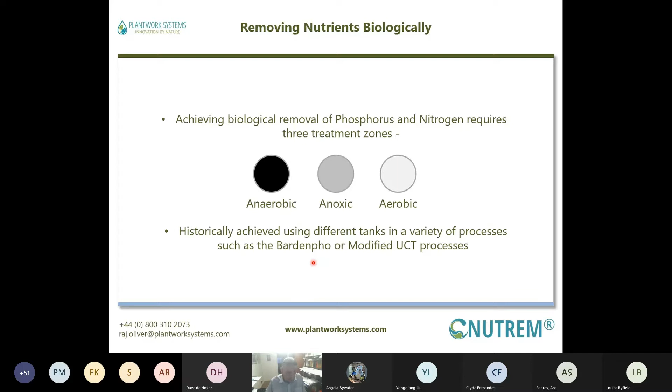NUTREM provides these conditions in one reactor. It's totally different. The whole thing, with various phases, is packed into one single reactor.

The prescription can be easily multiplied regarding the size of the plant to be designed. What is important to notice is that the process phases are separated from each other by time rather than physical space and volume in the form of various numbers of tanks. This basic difference provides benefits in great flexibility in process control, small footprint, and a better price.

Here you can see the indicative process diagram in general. We will go through the details later in connection with individual equipment. The front end, as usual, has 6 mm screening and grit removal, and FOG removal in special cases. There's an offline VFA factory to boost the functioning of the BTF, which plays a double role as a flow balancer and a holding capacity to allow dump fill into the reactor. The number of BTFs and reactors is determined by the number of loading heads producing the wastewater.

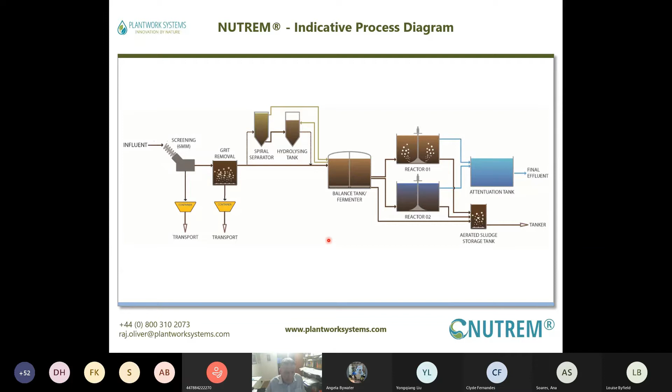In the process, the influent is collected within the balance tank where it is mixed mechanically and gently in set periods to back up the fermentation process. The influent is then fed slowly into the settled sludge blanket within the reactor, whilst the reactor is in settlement mode.

The hyperboloid mixer is set to mix at a super slow rate and not to break the top of the blanket. The reactor decants the effluent of the preceding cycle by the piston force feeding the effluent out via a special siphon decanter.

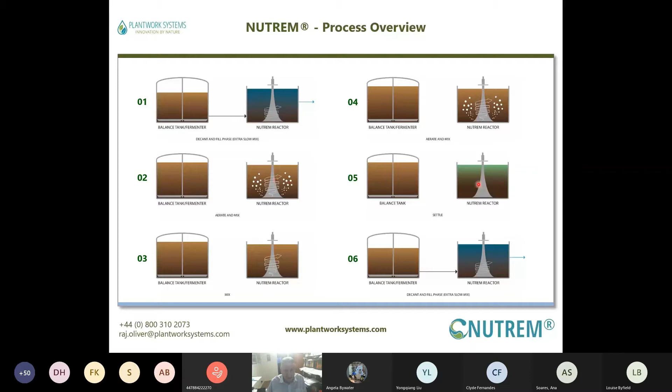Once decanting is completed, the transfer completes and the reactor fills. Regarding the targets, the reactor is then either anoxically mixed or aerated. A second anoxic and aerobic phase can be performed, and the process then repeats: from the balance tank to the reactor, then anoxic mixing or aerated mixing and settling and repeating and discharging again.

Here's the balance tank fermenter combination. This combination is an offline hydrolyzing booster and inline BTF. It's one of the key parts of the process.

It's well known that the P removal process is a reciprocating P release and P luxury uptake, partial processes performed by PAOs. To work, the PAO bacteria need energy, which is introduced in the form of VFAs, the volatile fatty acids produced from readily biodegradable COD in the raw sewage.

The spiral separator takes 10% of primary sludge at all flow conditions, from dry weather flow to full flow to treatment or storm conditions. The flow from the spiral separator is fed to the hydrolyzing tank at 3% suspended solids content.

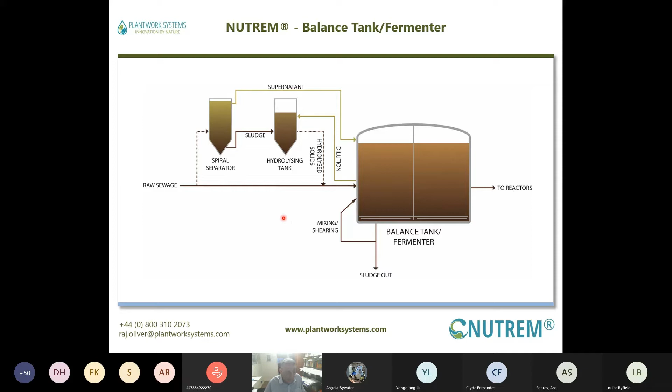Here's a view from inside the BTF. There is a slowly rotating mixer scraper close to the bottom of the tank, gently and frequently mixing the content of the BTF, which intensifies the fermentation, and on the other hand moves the thickened settled sludge towards the outlet opening for desludging.

Feeding into the reactor takes place at the bottom of the settled sludge blanket, which is one way to keep the settled sludge blanket at a standard height.

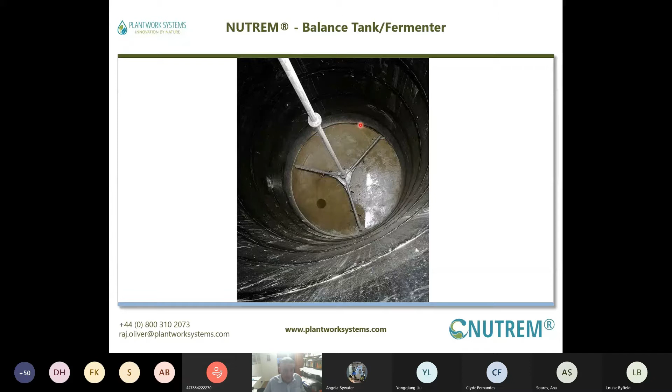NUTREM reactor seen from inside. You again see the circular tank, mostly made in our case in glass fused steel tanks, or at site cast concrete or slab made. And in the middle of the reactor is the hyperboloid mixer aerator.

On the outer circle you can see the shearing fins which shear the air in the aeration phase, an air pipe feeding the air into the sparger ring which is underneath the hyperboloid mixer, and baffle plates to prevent the whirlpool effect during the anoxic mixing, when there is only mixing on and not aeration.

When used for aeration, the air is introduced under the mixer body, through the sparger ring, and the shearing fins shear the air.

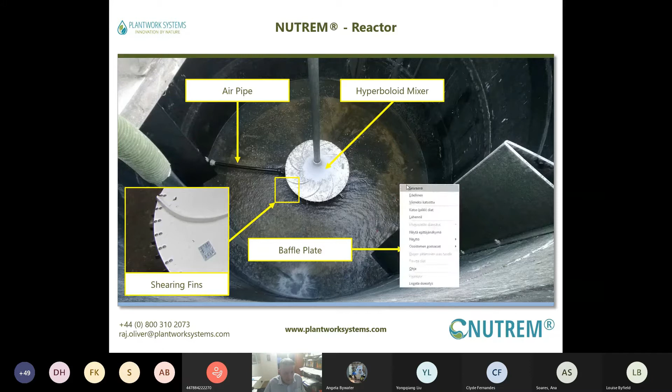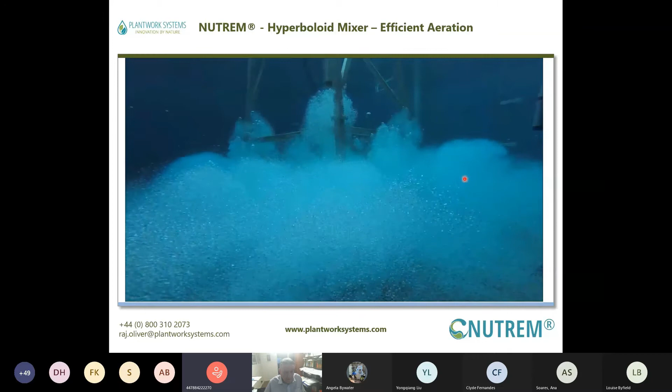This is very interesting. As you see, the air is widespread over the whole bottom of the tank with small vortices mixing it with the tank, and there are no dead spots which are found with fine bubble diffuser systems, where the diffusers can be far from each other and the bubbles rise directly upwards without mixing the whole bottom of the tank.

This schematic shows the hyperboloid mixer in a NUTREM reactor. The sewage from the BTF is introduced from underneath the hyperboloid mixer, whilst the mixer rotates very slowly. The contact between the incoming raw sewage and settled working anaerobic sludge is ideal.

This is a real winning property of NUTREM. The sewage fully mixes with the settled biomass and infiltrates upwards through the sludge, contacting the worthy PAOs, which release the phosphorus from the cell mass into the surrounding bulk liquid. We call this a piston effect.

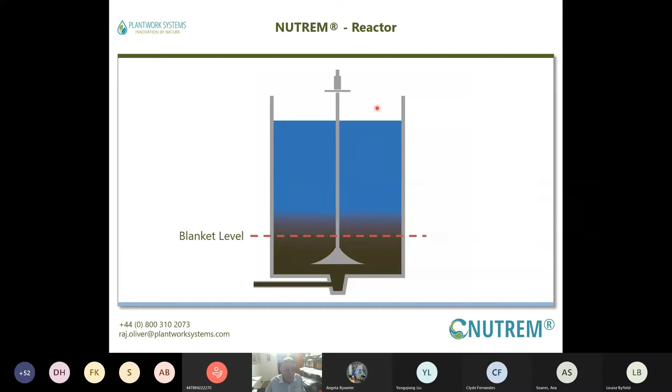At the bottom it's almost 8,000 milligrams per liter, gradually decreasing when rising up, and at 1 meter there is almost nothing left. At 2 meters, where the blanket top level is, the whole settled mass is tightly there.

The blanket top is sharp like a knife, we say, and released phosphorus at the bottom, where it has been the longest time in contact with the incoming raw sewage. The released phosphorus concentration can be 200 milligrams per liter, gradually decreasing the higher the measuring point is.

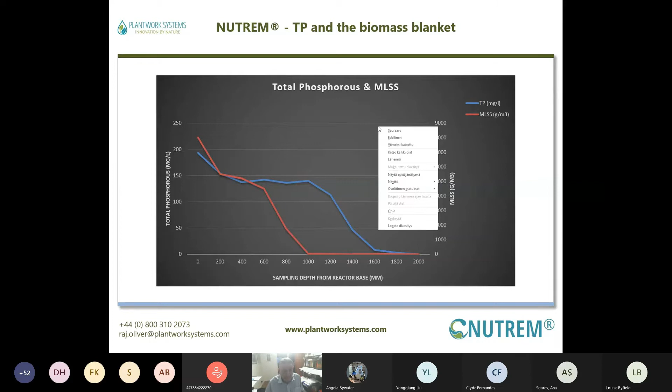At 2 meters there is almost no phosphorus in the bulk liquid. This is surprising, and the same now in the table: at the sampling height at the bottom, total phosphorus 193, MLSS 8000, with gradual decrease and gradual increase.

The total phosphorus can be 0.15 at the top of the blanket, and suspended solids 5. This shows the very good settling properties of the active sludge.

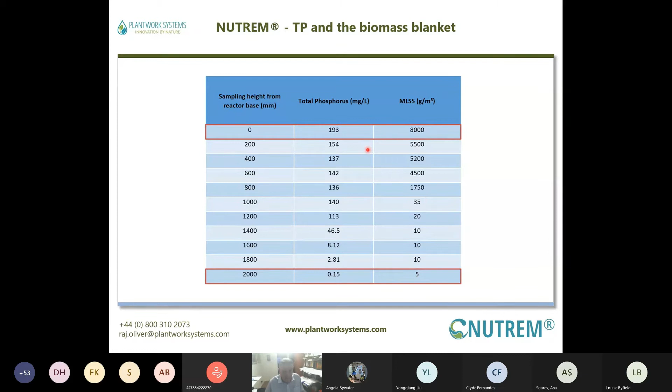Why is this important? It is important for the safety margin, because after a full load there is still a 2.5 meter clean water layer. There is a deliberate stratification in the piston below the discharge point, and this was very hard to believe for the professionals when we first introduced the idea of the piston discharge.

In SBR it's important to save time for active phases of the process, so now the fill and discharge is combined. The normal water depth is 5.8 to 5.9, which provides an even larger safety margin. The 5.8 relates to calculation; the aeration height of 5.9 in an SBR gives the best price for capital costs and expenditures.

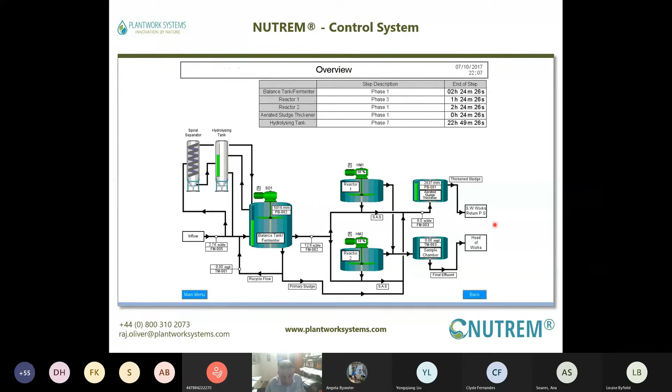Here's the balance tank fermenter, and you see the 2 reactors here, and the colored pump shows what phase is going on. The normal route is from the main incoming sewage via the front end into the balance tank, to the reactors, aerated sludge thickener and sample, and outflow to works.

P7 is pumping that out, returning.

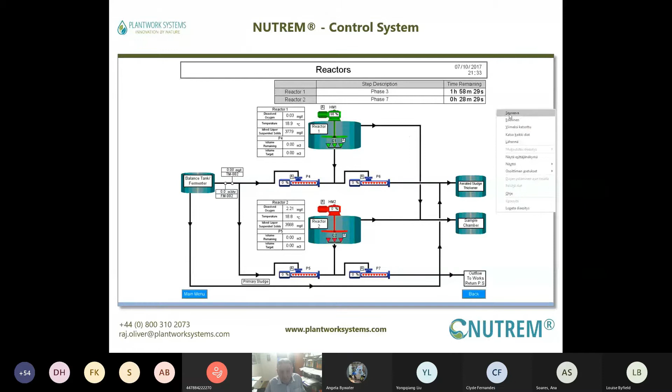And where is the home of the pilot plant, or test plant, or however you like to call it? It's at Hants, south of England, located at Southern Water Petersfield sewage treatment plant.

That's pretty far from the front end where the flow is coming in, and at the front end there is screening and grit removal, and the main tunnel forward, plus the ferric dosing and the intake point for NUTREM, before the dosing, to get the real raw sewage there. The line has been installed here and the test plant is around here.

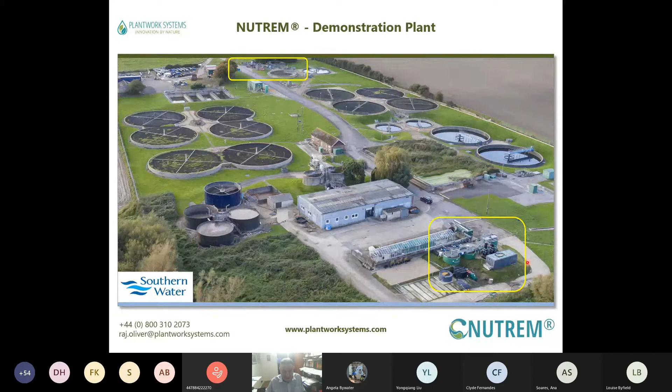Our normal prescription: balance tank fermenter, reactor 1, reactor 2, aerated sludge storage tank - this is the main combination.

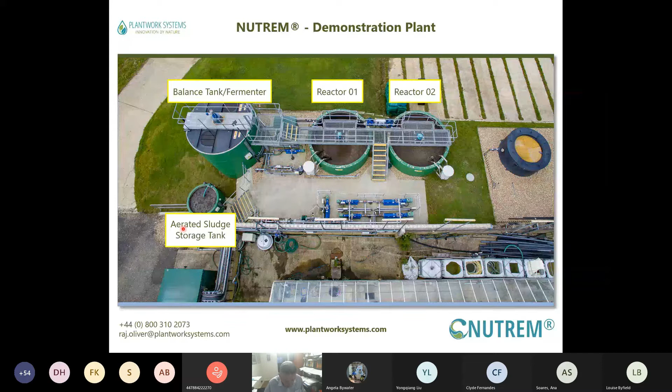The next one was commissioned September 2014, with a limit to take only 50 cubic meters, which was the actual fixed load. The consistent results demonstrate TP removal down to levels of 0.1 to 0.3, and stable operation maintained during winter periods when there was diluted water.

Ammonia - you can see it is diluted, because in a separate sewerage system country this can be 70, 75 or 80 milligrams per liter, but here when all the water is collected into one big sewer, it's diluted. The actual result, in milligrams per liter, is 0.28.

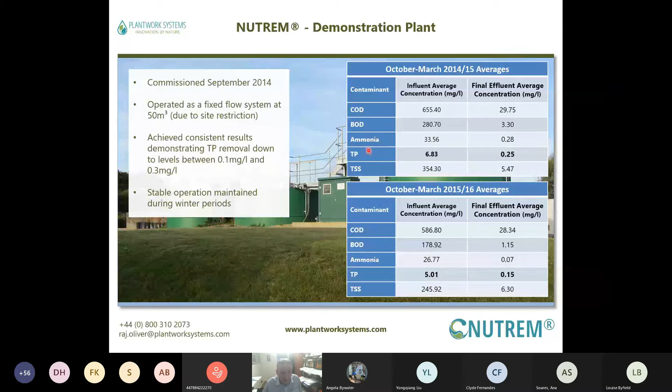And then we went to the UKWIR test, where phosphorus removal was the number one target, and we installed the spiral separator and the hydrolyzing booster to improve the VFA production, because the incoming raw sewage was all the time very much diluted, and the fluctuation during the diurnal flow period was very big.

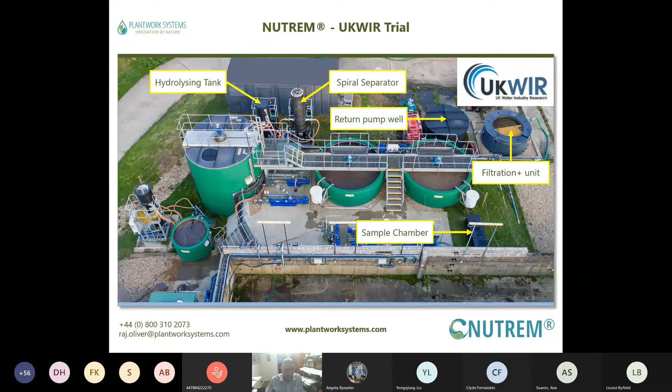Sample chamber here, where it's coming in, and the siphon decanters can be seen here, and the plant return well. Here you can see how it's arranged: there's the main wastewater treatment flows and the NUTREM plant flows, and the permission to take water for the UKWIR test was increased from 50 cubic meters per day to 120 cubic meters per day, to follow the real normal life of how the plant is living.

As you can see, this is September 30th: 3 o'clock at night, 6 in the morning, 9 in the morning, a jump up at noon, and in the evening, as normal, the high point there, and here it's now already close to 140 cubic meters.

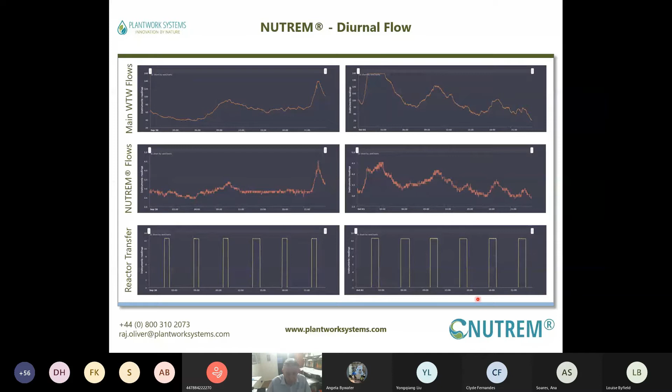The NUTREM plant curve is similar, totally similar, and the NUTREM is fed regarding these flows. We have six strokes per day, or six cycles if you like, and four various sizes of cycles. The pillars here describe the fill, how much the fill is, and the wider the pillar, the bigger the flow. You can every day follow these on the screen from home, from the office, or from the kiosk at site.

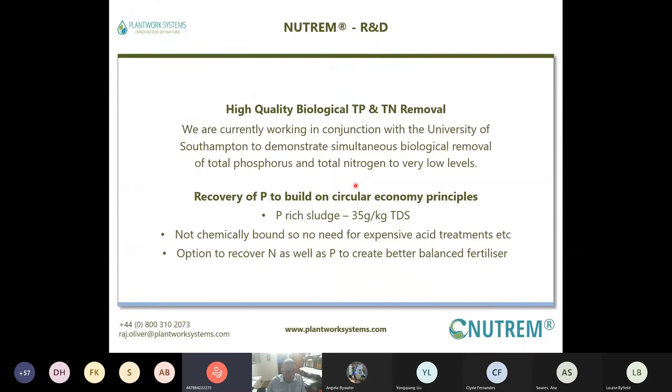I thank you very much for your attention, and I'm open for questions, professional questions.

When I was first in this country in 1990, we had a presentation at St. Peter Hotel at Guernsey Island, a very beautiful Victor Hugo ballroom. After one hour's presentation, I said I'm open for questions, and several hands rose up, and the chap in the front row was there, and I said, it's your turn. He popped up and said, who else wants to go to the toilet? So, other kinds of questions, please.

Thank you, Juhani, thank you very much for your excellent presentation. Yes, there are a lot of interesting questions for you, so I will pick up some questions first, and you probably answer a few. After Anna's presentation, we can put the remaining questions at the end of the session together. Yes, I think, sorry, it's my pleasure.

One question: for the traditional BNR process, if it is well operated, usually the TP can reach as low as 1 milligram per liter. But for NUTREM, you can reach much lower levels, such as 0.1 to 0.3 milligrams per liter of TP. What is the critical factor that makes NUTREM successful in achieving lower TP?

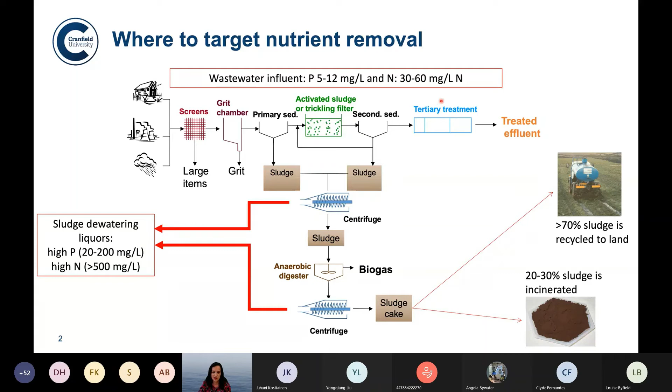As Juhani was mentioning, the sludge and the nutrients that accumulate in the sludge, especially if we have a BNR process, there will be high concentration of phosphorus, as this is removed by capturing within the cell. A way of recapturing those nutrients is to recycle the sludge to land. There's a lot of initiatives as well looking into sludge ashes from thermal processes to recover those nutrients, especially phosphorus. So there's a number of initiatives and processes. I think Juhani's presentation was mainly about BNR processes and removing the nutrients, but I want to focus here today on the recovery of nutrients and why we should focus on recovering those nutrients.

Phosphorus has been under debate for a long time - it's been called the disappearing nutrient. It's currently mined in quite specific countries such as Morocco and Western Sahara, which have sort of the biggest reserves of phosphorus. There has been quite a lot of information out there about how much phosphorus there is worldwide and how big these mining reserves are. Back in 2006 there were some numbers published saying that the phosphorus reserves were about to finish, that we had about 100 to 200 years left of phosphorus if we continue to mine at the same rate.

This created a little bit of awareness, but also some countries that have quite a big production of phosphorus, such as United States and China, have started looking at their exportation of phosphorus in a different way. This has created a debate about whether we can capture phosphorus from wastewater, and the best ways to do that, and then try to put that back into the market - for example chemical production, fertilizer production, etc.

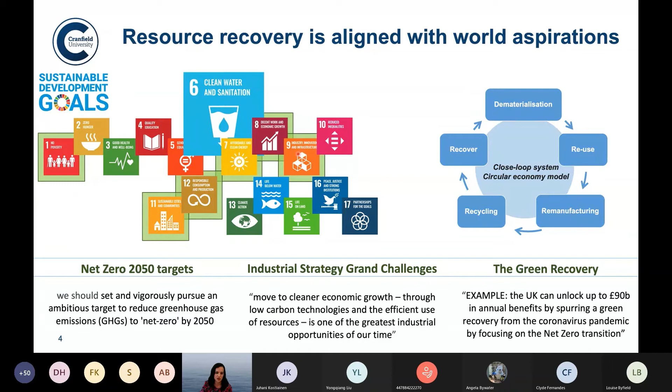And then, of course, at the center of this, we have things like the Sustainable Development Goals, where clean water and sanitation needs to be put into context with sustainable cities and communities, with industry, innovation, infrastructure, just to mention a few. So all of those things are linked together, forcing us to look at different ways of how we manage wastewater in general, and nutrients.

And so there's been a lot of work done in the last decade, the last two decades, looking into both nitrogen and phosphorus removal and recovery.

So within the biological processes, most of them are based on just removal. We have nitrification, denitrification, deammonification, with high technology readiness levels, being applied at full scale - processes that we know very well and can build and operate without many issues.

In South Europe and other countries with a lot of sunlight, we start to see algae and algae-related processes to remove and manage nitrogen.

And currently, we see a boom in ammonia stripping processes, mainly from sludge dewatering liquids or digestates that have very high concentrations of ammonia.

And within these ammonia stripping processes, some of them are not new processes. They are applied within other industries, chemical industry for example, and we're making that knowledge transfer to the water industry. This is us trying to recover that ammonia and then find a purpose to reuse it.

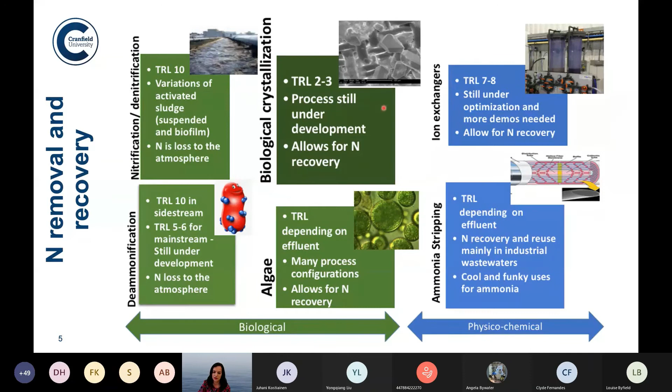This has a lower TRL level, so we're still very much understanding the process at lab scale at the moment. And if we look now into phosphorus removal and recovery, there are a few more options for capturing phosphorus from wastewater, as we've been discussing.

So BNR will accumulate phosphorus in the sludge, and this can be released once it's applied to the soil. There's algae as well. And then we have other processes that look into vivianite recovery, both related with chemical dosing for phosphorus removal, or BNR processes.

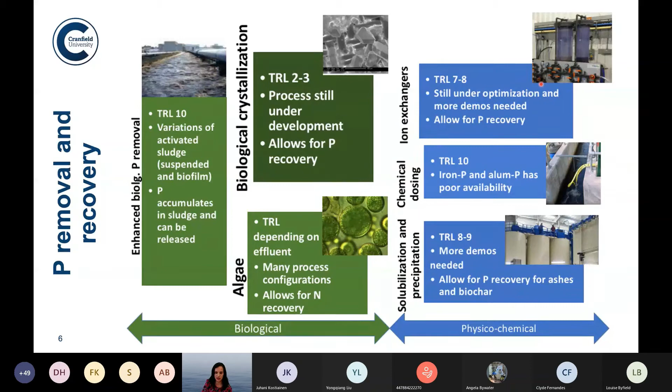There's also the recovery of phosphorus from ashes and biochar. And I'll also be talking a little bit more in detail about this ion exchange process. When we look into all these different technologies, I'm really just touching the surface about what they are and some of the options - there's much more described in literature.

It's important that we don't forget how these technologies are going to work with everything else on site, and how we're going to integrate them into existing treatment plants. In the UK, there are very few greenfield sites, so whatever we do has to be compatible with the older technologies that have been established for a long time.

It's important that we think about how we manage the byproducts. For example, if I'm talking about the ion exchange process to recover nitrogen and phosphorus, this will lead to some chemical waste that needs to be managed. Also, within the ion exchange process, this works very well in wastewater that has a low solids concentration, so what are the technologies that can make that ion exchange process work well?

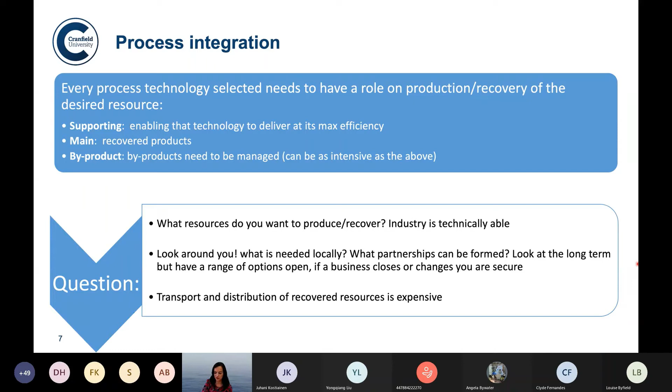Ideally, you want to work with local stakeholders and form the required partnerships, so when you recover those products there's an end route for them—somebody that will be interested in taking them and making use of them. This isn't simple, because there are regulatory frameworks to be considered as well. There's quite a lot of effort in this area of resource recovery.

In one of the projects I'm involved in, looking at that integration of resources with stakeholders and regulation, is a European project called NextGen, where we have around 35 partners and 10 demonstration sites, where we're looking at water recovery, nutrient recovery, and also some energy recovery.

In this project, our role is to test and demonstrate a very specific type of wastewater treatment facility, where we're looking into recovering energy from biogas production through a main treatment of carbon using an anaerobic reactor with a membrane.

We also follow up with an ion exchange process to remove and recover the nutrients. With this combination of processes, we can achieve a really high effluent quality that allows for water reuse. Because we're not dealing with the ammonia in a biological process, and we're capturing the carbon as biogas, we have very low greenhouse gas emissions, including the dreaded nitrous oxide. There will also be savings from not aerating in the mainstream, so overall we have quite an efficient process.

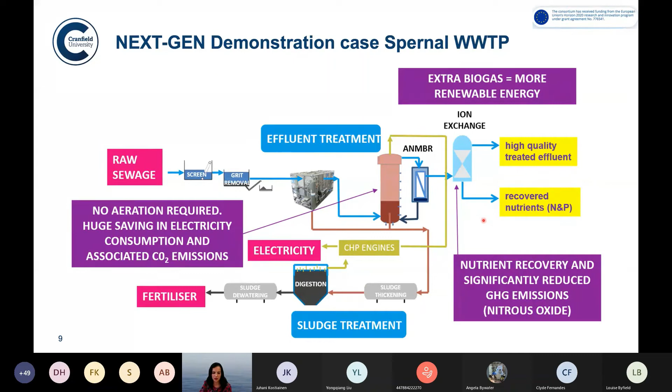This process, as I said, is being deployed in Spernal. The anaerobic UASB reactor is a 500 meter cubed per day reactor that's currently being commissioned, and we hope to achieve some data very soon.

We also get to produce some electricity from the biogas, but we're also going to produce a massive amount of heat, so we're looking into ways of reutilizing that heat in a meaningful way.

The beauty of having a UASB coupled with a membrane is that we can promote hydrolysis, so we can retain all the solids inside the anaerobic reactor for long periods of time, and we can achieve methane yields that are very comparable with traditional anaerobic digestion processes.

What this UASB membrane reactor doesn't do is touch the nutrients. If anything, we'll see an increase of both ammonia and phosphorus, once again due to that solids hydrolysis. The effluent will contain the same amount of nutrients as you have in your influent, plus or minus 20%. So we would need to remove those nutrients.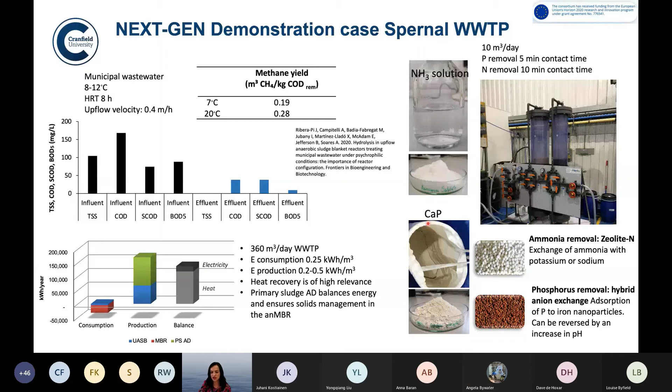During the operation of this plant at Cranfield, we produced many batches of phosphate that we used in trials investigating its fertilizer value. One of the things we observed was that over time, we always saw a little bit of COD removal after the phosphorus removal column, about 20 to 30%.

Over time, the resin became coated with this carbon that we have found to be some sort of humic acid, so recalcitrant carbon. But then we can clean the resin by regenerating with sodium chloride. We estimate that probably this needs to be done every 6 or 7 months, depending on the quality of your wastewater, to keep a healthy resin, so you can use it for a very long time.

So we looked into the product quality as well, and we saw that the calcium phosphate had very low concentrations of impurities, including organic. We tested quite a few of them, including priority substances, and it had very little concentration of heavy metals, much lower than, for example, the phosphates that we mine, opening a range of routes for its application and looking at different markets as well.

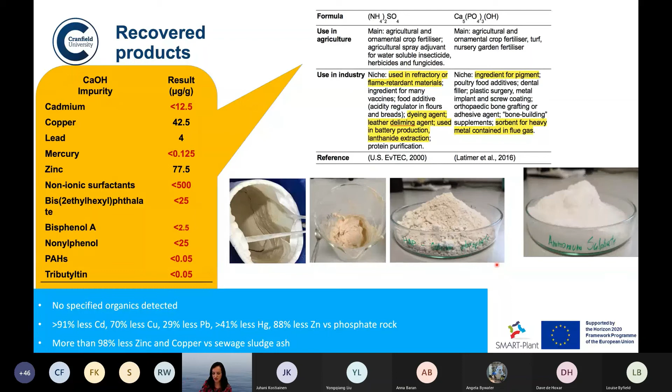So we have done quite a comprehensive study here. There's not much time to go over all the details, but I'm happy to answer any specific questions that you might have at the end of the presentation.

We also consider it to be of high relevance to have processes and technologies that can be integrated, but that have some sort of benefit for the environment. That will be seen clearly when we manage and recover the nutrients a little bit better. But it's also important that it makes economic sense and has some sort of economic benefit.

So wastewater treatment plants are not there to make money. They're not there to be self-sustained. There will always be some investment required, even if we sell all the imaginable products from a wastewater treatment plant, they're still going to have an OPEX that needs to be covered somehow.

So one way of measuring the benefit of a certain technology or treatment or combination of technologies would be to compare it with existing ones. So here what we did was compare the capital costs and operational costs of a traditional BNR plant with a plant where we have the ion exchange processes, and one where we have the anaerobic membrane reactor and the ion exchange processes. This is without considering any potential economic benefits from selling products.

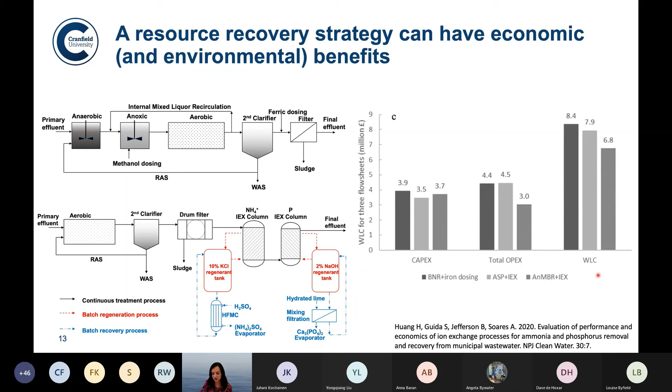But if we want to recover products from wastewater, then maybe these are some of the steps that we need to do and think about on the longer term, and what the benefits might be.

Another project of mine that I find really interesting looks into biomineralization, and this is related to the ability of microorganisms and bacteria to produce minerals from their biological reactions.

Biomineralization has been quite well studied and documented in biomedical sciences. For example, kidney stones are produced by infectious bacteria that lodge in people's urethra and around the kidneys, and there's quite a lot of documentation about those.

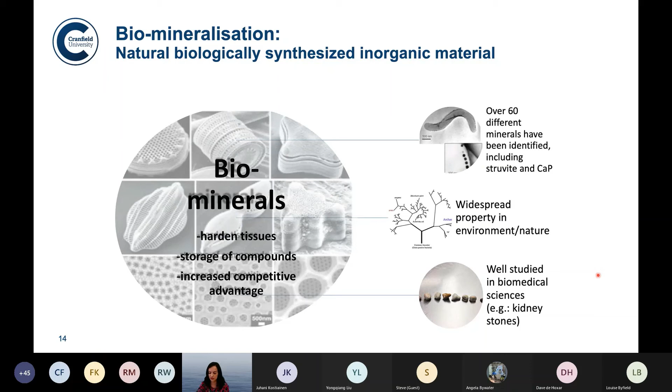But we know that this biomineral formation ability is quite widespread in the environment and nature, and there's been over 60 different minerals documented, including struvite, calcium phosphate, just to name a few. But we don't know much about this bacteria, and especially how we can apply them to a wastewater treatment plant.

So I have spent quite a bit of time trying to understand how these biominerals are produced and what the mechanisms behind this are. There are mainly two different ways where bacteria produce biominerals: one is called biologically controlled mineralization, and the other is called biologically induced mineralization.

In both ways, the bacteria find a way within their mechanism to increase supersaturation of the elements. They form crystals within their surrounding environment, or intracellularly forming nucleation points. And once these nucleation points are formed, crystal aggregation and crystal growth can happen at quite high speed.

In biologically controlled mineralization, we see beautiful crystals, all very homogeneous in size and shape, while in biologically induced mineralization, the process takes place outside the cell, leading to the formation of crystals that are a little more heterogeneous in size and shape. But both of them are really quite interesting.

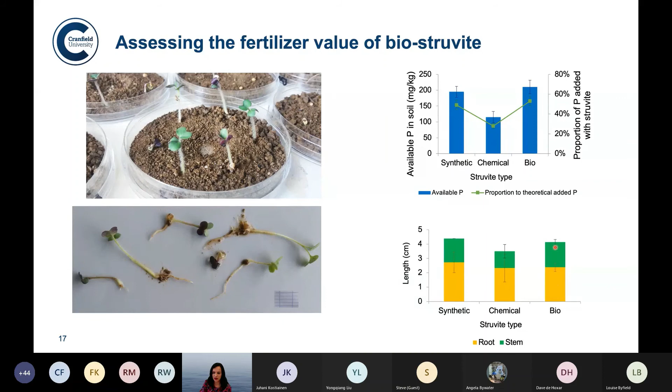We have also been assessing the fertilizer value of this recovered struvite. We've done this in small-scale petri dishes, and in the case of the biostruvite, we see that the phosphorus becomes readily available in the soil. Looking at the length of the roots and stem, in this case with mustard seed, we also see that the biological struvite performs very similarly to other synthetic fertilizers.

We also looked into the composition, trying to check for other pollutants, and once again we obtained a fairly clean product with up to 12% of phosphorus, very similar to other recovered struvite products.

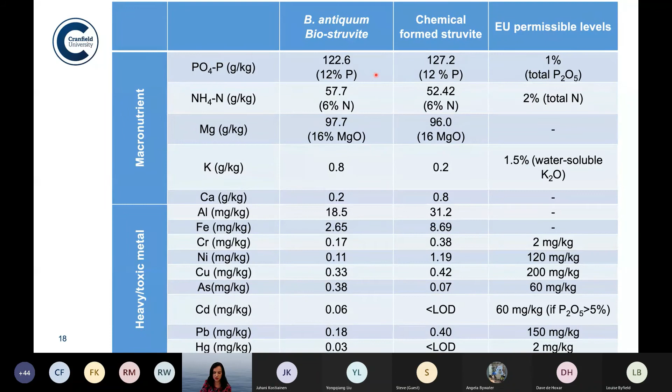At the moment, this is still a low TRL technology, so all the studies we have completed have been with pure cultures. We've been trying to understand how we can take this process further, and one of the challenges is working in mixed culture settings.

We tried to add some cultures of Brevibacterium antiquum, for example, to the dewatering liquors, and of course that culture gets completely obliterated by the competing microorganisms.

So to go around this, we're working with a company called MicroV Technologies, where they produce a catalyst where we can encapsulate our struvite-producing bacteria. This way we're trying to upscale the technology and work with mixed cultures, both in wastewater, and currently I'm also looking into urine treatment in decentralized systems.

Decentralized systems are gaining quite a bit of relevance because we see that as the public is gaining a little more understanding of their carbon footprint, technologies are being developed for applications at a more local level, looking at local supply chains, etc.

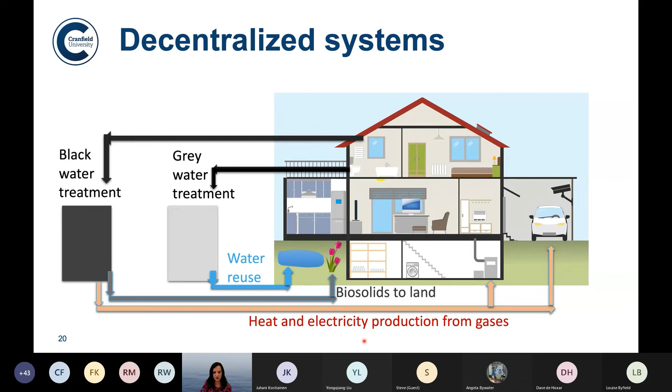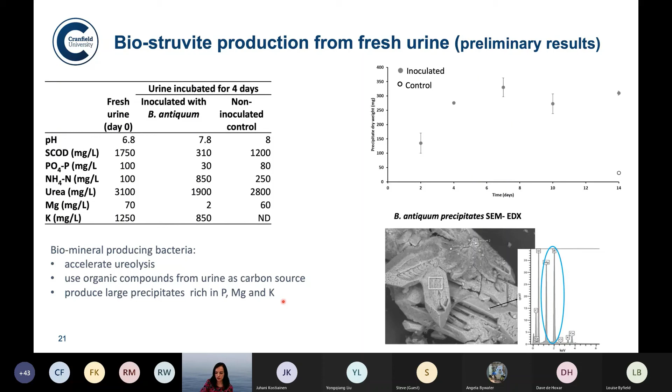We've also been using this concept of biomineralization to understand if we can recover nutrients from urine, and actually we've been doing that quite successfully. This is just some very preliminary data, but we can see here that when we incubate Brevibacterium in urine, we can produce a large amount of precipitates, and we have identified those precipitates as struvite as well. So this could be another potential way to try to recover nutrients in decentralized systems.

I think we cannot talk about resource recovery without thinking about the pandemic and COVID-19, and how resource recovery, especially of the things I was talking about, sort of salt and solid, but even sludge, is going to affect us in the future. I think there's not a lot of regulation currently on, or just very prohibitive regulation on resource recovery from wastewater treatment plants. So there's a need to understand that a little bit more in depth, and for us to provide information on the quality of those products with quite a lot of data and confidence behind it.

I think we need to think about this resource recovery as a manufacturing process, where we have procedures, we have quality control, there's customer relations as well. There's quite a few good case studies taking place, for example in the Netherlands, where resource recovery from wastewater treatment plants has been made an absolute success. But those things are quite imperative that they take place.

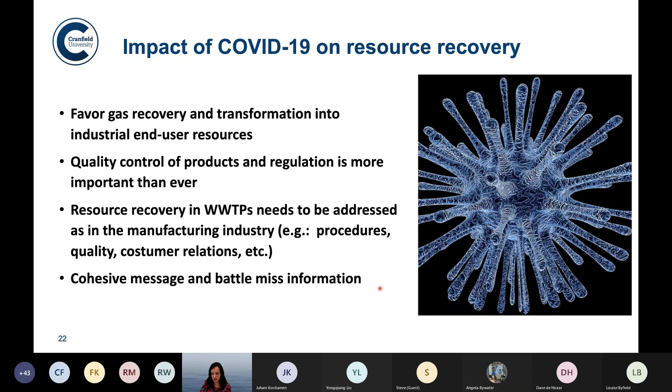And I think we need to unify ourselves as well, especially bringing a single message and battling misinformation. I have seen all sort of news about sludge recycling to land and COVID being there or not, and it's just sort of scaring people. So we need to think about how to convey those messages and help drive resource recovery.

About future perspectives, I think a lot of the drivers that we see currently and where we are, probably the next generation of technologies will be hugely influenced by these net zero targets, combined with more rigorous regulations and the need for water reuse as well.

So in the future, I think we will see more technologies that actually recover gases. That could be ammonia gas, biogas, maybe not for burning and producing energy, but maybe to produce chemicals and other interesting compounds, methanol. We can combine nitrogen and the biogas to produce protein. This is something we're currently looking at with some colleagues in Europe. So the possibilities are endless.

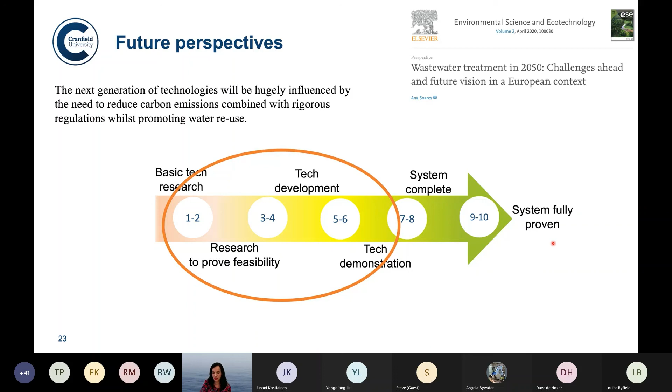It's just that a lot of the technologies we're currently working on are still reaching that technology development stage, just about to go into technology demonstration. So I think the next decade will be critical to reach those higher TRL levels where we see implementation of these technologies at full scale. And I'll be very much looking forward to that. Thank you so much for your attention, and I'll be happy to answer some of your questions as well.

Thank you, Ana, for your presentation. I think there's some questions. Although our time is 1:30, I think it's better to take one or two questions from the audience first. So there's one question about decentralized wastewater treatment. Is this the proposal, for example, for the UK, or if so, what time scale to replace existing infrastructure, or only for new buildings or elsewhere?

I think this would be mainly for new buildings, it will be of higher relevance. It's just that for existing buildings, changing existing infrastructure, meaning piping, heating systems, will be too complex and too expensive as well. So I think this will be more relevant for new builds, especially in the UK. In other countries where there's no infrastructure, it might be that they take on a different approach as well.

Okay, so I think another question is about, for both speakers, biological removal or chemical absorption of the phosphorus — which works best under what circumstance? For example, for farm use, or what else? So probably Juhani first. For biological removal of the P, because the P is accumulated in sludge, can we directly use that P-rich sludge for farm use?

Well, in my home country and in total Scandinavia, it has been researched very deeply and looked at after the phosphorus. The first phase was, of course, because the chemical dosing was dominated, so it was the sludge composting.

But nowadays we have several processes under discovery and under research, which I do not know exactly, but one of my old friends is working with that, and I have seen the test plant. And the thought is that it will be short distance deliveries, so it would be local, small plants and local.